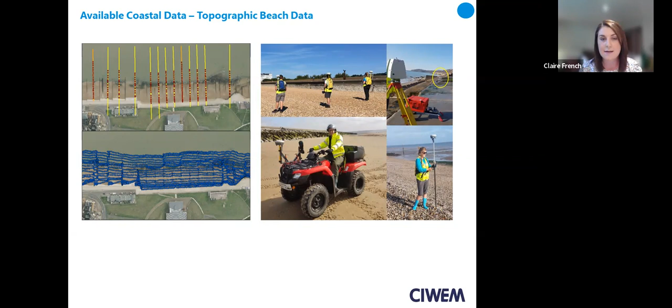Moving forward in time, probably 5 to 7 years ago, we started to go for mobile data scanners, so mobile laser scanners. It's a bit like Google Street View. We can mount a camera onto the quad bike, drive along the beach, and it collects data much like a static scanner, so the point density is much greater.

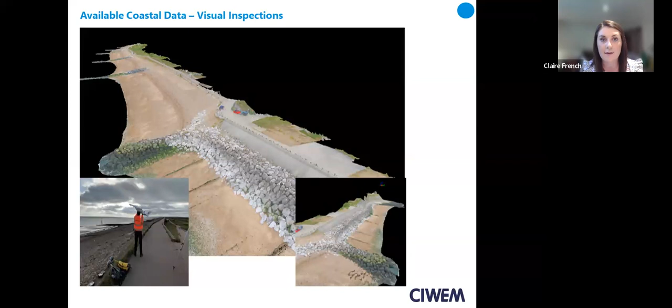More recently, again, sort of 5 or 6 years ago, we're looking at UAVs. This is an output from a UAV data set. You can see the difference in comparison to the points that we had on the maps in the previous screen. You can use this data set for beach analysis and also structures, so we're looking at assets. And then lastly, it does just give updated aerial photos.

Moving on to aerial photography, part of the monitoring programme data that's available, freely available on the coastal monitoring website, is ortho-rectified aerials. For the majority of the frontages, we've got aerials from 2003, 4, 5, right up to current day, collected every few years. They can either be used, in this instance Dungeness Peninsula, to gauge linear meterage accretion, basic visual assessments, or just used as underlay in your GIS programs to overlay your data and as a visual tool.

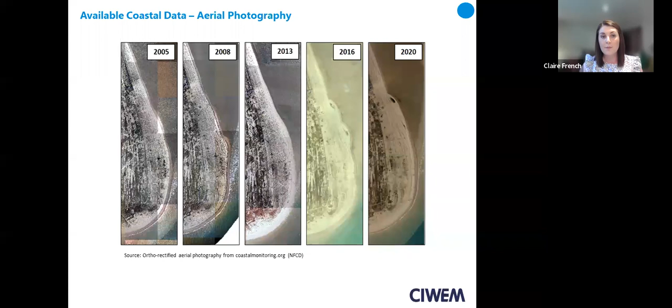Moving on to structure surveys. This is again the available data that we need to use for all our projects. This is essentially a continuation of the beach profiles, so the transects go up and over the defences.

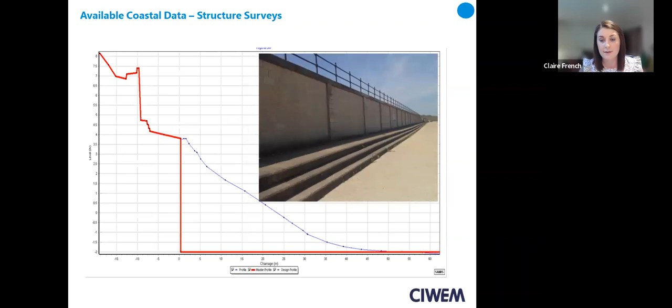This can either be a one-off or we can do it every few years. Again, this just provides a basic schematic with all the elevations and detail to do with the defences behind the beach. Where we don't have that information, it might be available through local authorities or the EA, or if doing it on a project by project basis, this is something we commissioned ourselves.

So the structures topographic surveys give us all the data for the visible defences. However, we don't actually know what's going on underneath, the buried part of the structure. Data we've collected before is through trial holes, where we've uncovered the buried section of the defence, either to ascertain the schematics and levels, or to aid the condition assessment.

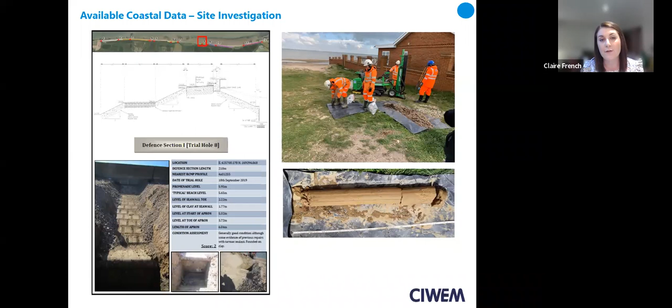As part of that, we can either draw up, or we would already have, structure schematics, which give us the elevation and geometric design. Alternatively, something we've done in the southeast is commission boreholes. One of the projects we were working on was a flood defence bund and we needed to ascertain its structural integrity, so we ended up coring through it. Some local authorities may hold this data as well.

Moving on to live wave and water levels. Quite a lot of this data is available on the Coastal Monitoring website. There's a real-time page which shows the network of wave buoys and tide gauges, many of which have been in place for 15, 20 years. That data links through to the Cefas website, which has additional wave buoys, so you can use both interchangeably.

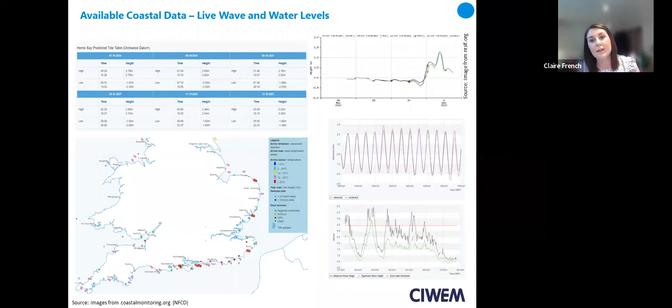The Coastal Monitoring website has all the tide levels available for all the tide gauges around the network for a week at a time, always a rolling week. There's real-time data for wave periods, swell waves and tide levels. In addition, we dial into the National Sea Level Facility, Tide and Sea Level Facility website for storm surge data. This can be used to aid emergency planning for storms, and it can predict surge levels if you're going to attend site.

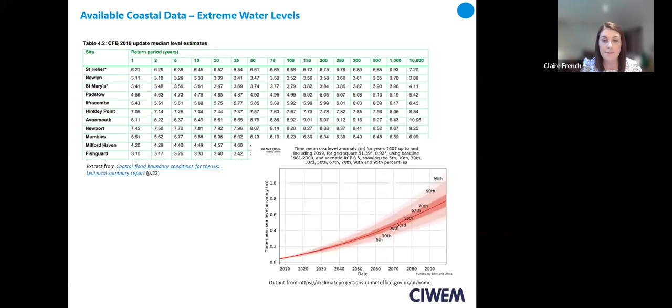Then moving on to extreme water levels. JBA produced, on behalf of the Environment Agency, coastal flood boundary conditions. This was an update of earlier work, done in 2018 to update the extreme water levels. That's available on the Gov website, and we also use the UK CP18 climate change predictions, both large data sets available online.

Lastly, for raw data, recycling logs are quite crucial for understanding beach management. It also allows us to create a do-nothing scenario and strip back the as-surveyed data to understand natural processes. Monitoring programme leads should have the majority of this information as it should be incorporated into their annual reporting. If not, local authorities and environment agencies should also have details of their recycling or replenishment works.

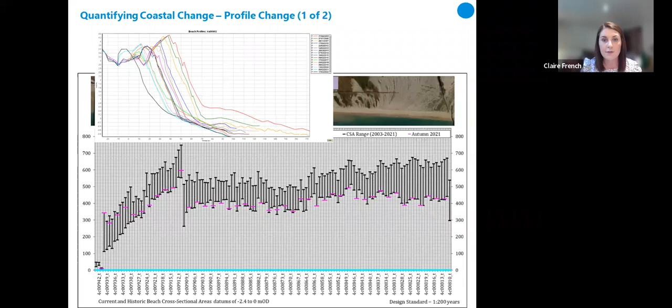Alternatively, you can just do simple mathematics, take one away from the other and get a difference. We can represent this in GIS using thematic lines, color coded based on the percentage erosion, displaying either percentage or actual change. Not all our beaches are bright red - I've picked one that's a bit more interesting. These are produced from the monitoring programme, but it's quite simple to replicate for your own projects.

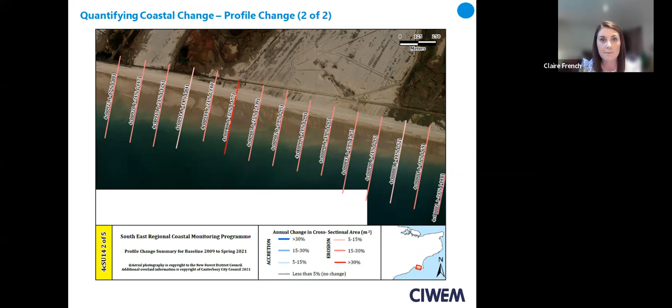Starting to move on to volumetrics, again we'll start with the very basic. If we've got one digital ground model, we can take it away from the previous set and it will give us a difference model coloured map.

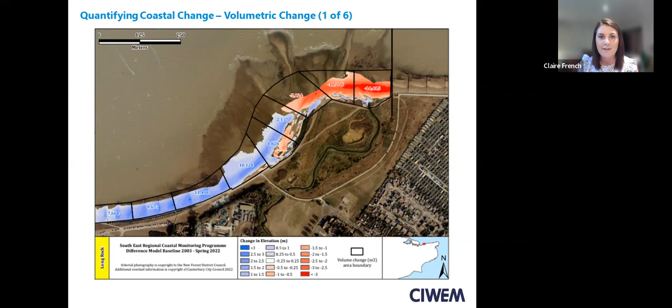We can overlay polygons so that we can do some spatial interrogation, and it will quantify the loss or gain experienced on the beach. So the two sections in bright red on the north, that is the section for the profile that I just showed you with the 50-metre retreat. Again, quite nice graphics to illustrate your data.

Alternatively, you want to start to look at total beach volume - that's quite handy in some circumstances. So we can use a plane, whether that be rock level, chalk platform, clay level, or just an arbitrary 0 metres above ordnance datum. You can create what we'd call a fake grid and do a difference model with your most recent data set to give you the current total beach volume.

You can extrapolate that data forwards or backwards to give you a total volume change graph similar to this. This is purely measured on as-surveyed data. The large jump in 2010 to 11 is actually a beach replenishment scheme, but it's masked in the monitoring programme data if you're just taking that data on face value - so that's what you need the recycling logs for.

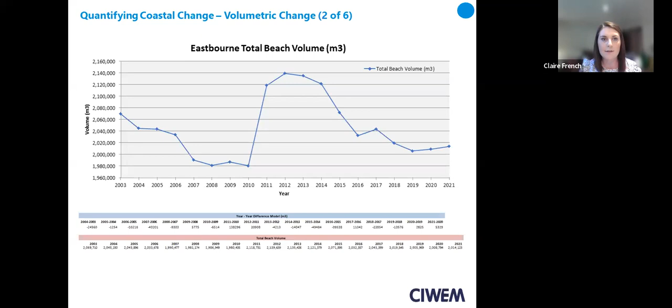So then if we go to a more in-depth analysis, for this we've used Sediment Budget. I won't go into it in too much detail because it's not a presentation on Sediment Budget, but I will recap what we've done. We took the Rosati and Kraus Sediment Budget analysis system method, slightly amended it to include natural losses. The equation's the grainy thing in the middle.

We know all of these inputs with the exception of the output. The output will be the longshore drift rate. So the Q input is the volume of sediment entering the cell. The delta V is the volumetric change - that's the survey change, which masks any human intervention. Then we've got the material deposited on the frontage, material removed from the frontage, and any losses attributed to attrition, abrasion, or associated with replenishment or recycling.

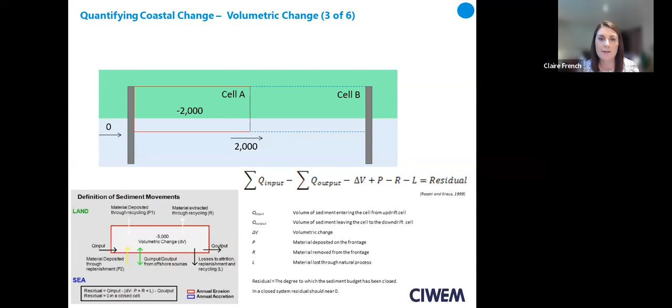So I will very quickly run through the calculation. My two grey sticks on the screen are my terminal structures. If we start with cell A, nothing's coming in, it's a terminal structure, so we know our Q input. The surveyed value is 2000, so we assume that 2000 is going straight into cell B. Our recycling logs suggest 3000 meters cubed is coming in from recycling and 1000 from replenishment, which increases the sediment transport rate to 6000. Due to the calculations of natural losses - your attrition, your losses from recycling - we've calculated 400 coming out of the cell, reducing the longshore transport.

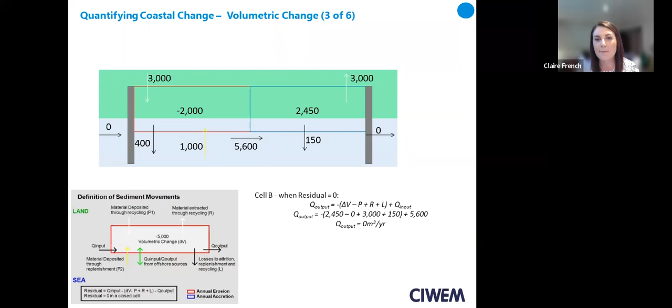Then we start looking at cell B, so there's a recorded gain on site of nearly 2,500, which would suggest that over 3,000 is now going past the terminal structure. Looking at the recycling logs, we know that 3,000 meters cubed was included as part of that recycling scheme, so now only 150 meters cubed is going past the terminal structure. But miraculously, that's all natural losses, and our sediment budget closes with a zero residual.

Once we started to do that, we can do it for any given length of coastline, and essentially it's just a process that works through the polygons we've provided, or that you can designate, and we can produce something like this. This is quite in-depth, and it shows the summary sediment budget. Just as a side note, because we've got 20 years worth of data, the difference models we would calculate would be the most current day.

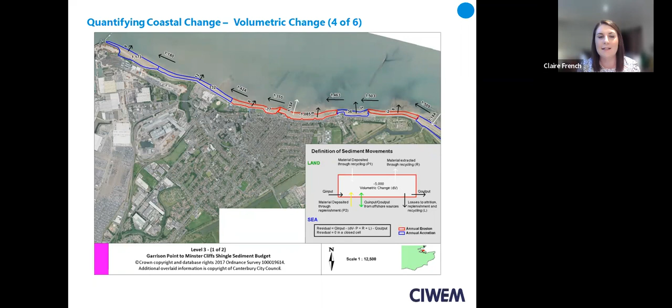So we've got 2022 to 2003, and we do an average annual calculation for all of these, all the recycling, all the difference models, and all of the transport rates. So we would consider that fairly reliable. It's a sort of an average of 20 years, and it masks any large storm events or any sort of unusual data sets.

That gives us, with some confidence, trends that are quite detailed. We could strip that back to just plot the natural trends. So if we basically undid everything that was added in, and added back anything that was taken out, it leaves us with a natural trend - if that work hadn't been done, these are the volumes or trends we could expect.

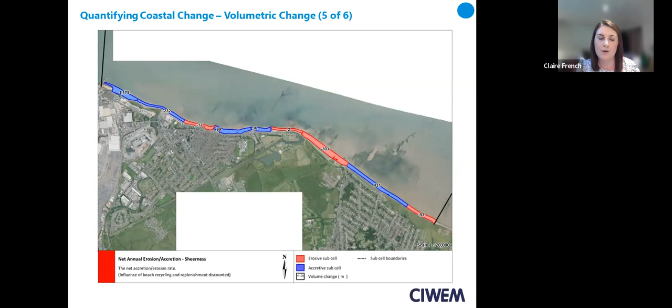Then lastly, we can just look at sediment transport. So we could plot the transport rate arrows, which, if there's an area where beach sediment transport rates are massively increasing, can highlight a possible area of weakness along the coast, where you didn't want a high transport rate. This can help start to look at beach management options.

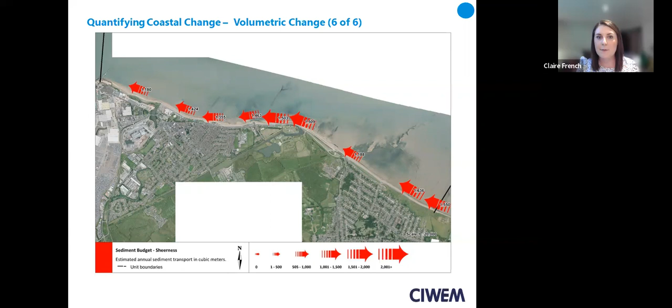So I'll hand over to Andy.

Thank you, Claire. In this section, I'm going to touch upon creating defence sections to represent your coastline. Then I'll touch on two failure mechanisms for beach and seawall defences - overtopping of the defence and undermining - and then trigger levels for beach design.

This is probably one of the most crucial stages. Before you start modelling a beach at all, you need to know what your different defences are. So you start by splitting them into representative sections based on the sea wall type, the crest level, any apron you've got in front, and any other features, whether that's offshore breakwaters, etc.

It's a bit of a trade-off, because you don't want so much detail that you have hundreds of sections, since there's a lot of analysis done per section, as I'll go into later. But equally, you don't want to be so broad-brush that you represent a whole flood basin frontage in a single section, because you might miss detail that would tell you where your critical pinch points are.

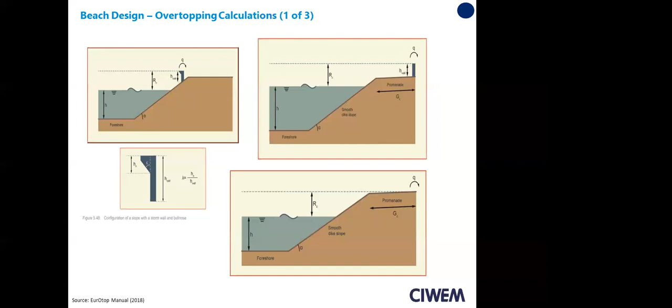Manual, but what we did at Canterbury was put it into a spreadsheet, which essentially allowed us to model various different defence types, still with a fair bit of manual input, but a lot quicker than using the online tool.

Cheers, Claire. Sorry, I apologise because only one of us can present. Claire's having to guess where my slides are coming from, so bear with us on that one.

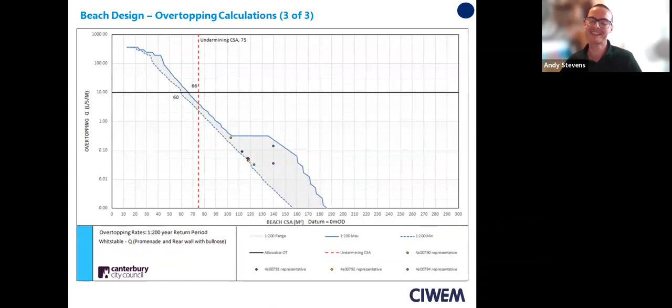Andy, just to check you there, I think we're having some connectivity issues. He's definitely frozen. Sorry, everybody, bear with us one moment.

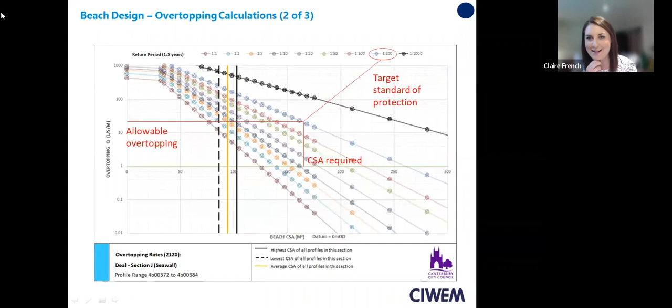Andy's going to leave and rejoin for us. Wouldn't be a presentation without some IT issues, eh? Hopefully he can jump back in. If not, I'll give his slides a go. Just a reminder to everybody listening, there is a question and answer function on Zoom, so if anybody has burning questions for Claire or Andy, feel free to put them in the Q&A box and we'll pick those up at the end.

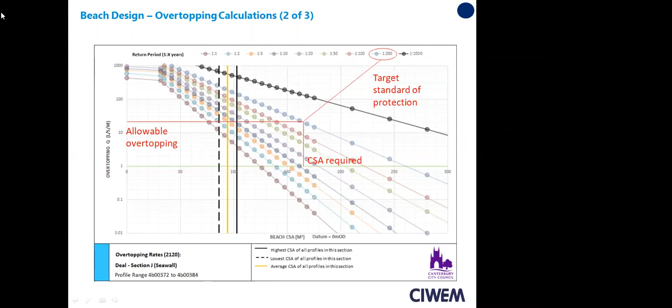Here we go, Andy's coming back. Let's just see if he's... Yes, I apologise about that. Technical. Hi, Andy. Doesn't tend to happen in person. Hopefully no problem. Sorry, did we get any of this slide, Claire? Yeah, we did, I think we just started on the next slide. So if you want to pick up from there, that would be great. Thanks, Andy, fantastic, yeah, great.

So this plot then shows similar, because we've modelled a range of beach configurations, the latest spreadsheet allows for up to 100 different configurations, so that's different sizes of beach berm, different elevations, and different beach slopes. This graph basically synthesizes all of that data, and it shows the maximum overtopping you could get, the minimum, and then obviously that range.

The point data there is just validation from various different beach profiles, so the data collected as part of the Regional Coastal Monitoring Programme, as Claire explained, that's basically different profiles within this representative section. Again, using this graph, we can read off the level of overtopping you'd expect per beach size. Because we've modelled a whole different range, when you're looking at your do-nothing scenario for the future, you can look at the worst case. So if the beach were to orientate itself in the worst case position with regards to overtopping, you can know what to expect, so it means you're not under-predicting future risk.

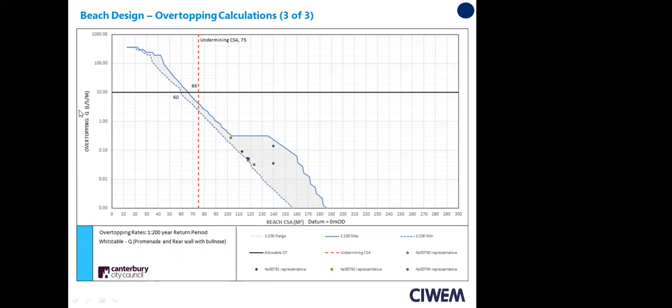Great, so the next one is undermining. This is a bit briefer. The methods we've used are fairly simple, because generally speaking, the failure mechanism here is that your beach in front of the defence gets washed away and it exposes the beach toe. Then you can either get wash out of fill material or in some cases overturning of the defence, but typically what you need to know here is your structure toe.

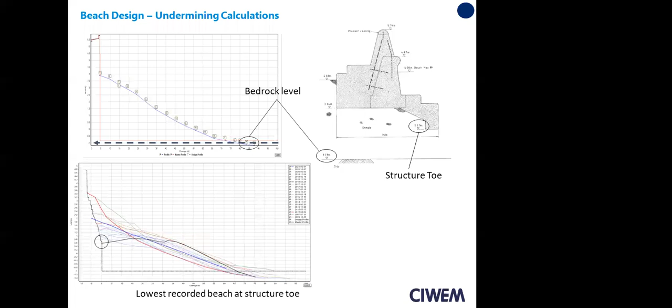So, trigger levels. As I said, we've looked at overtopping and undermining as failure mechanisms, so for both of those approaches we now have a cross-sectional area of beach required to provide protection against that failure mechanism, and from that you can start to design your beach. In the terminology we've used, critical gives you your standard of protection—so if your beach is on critical, you are just about, by the skin of your teeth, providing the level of protection you said you are.

Then we have buffer zones, which we call maintenance and design—sometimes they're combined. The Environment Agency often uses terminology alarm and crisis; different terminology has different emotions attributed to it. We started fresh when we did the regional beach management plans across the southeast, but we appreciate different people use different terms. With the design and maintenance level, you can go back to the monitoring data, look at what is the worst erosion we have on record, and apply that as your buffer, because then you've got a scientifically based buffer level rather than just guesswork, which may well have happened in the past.

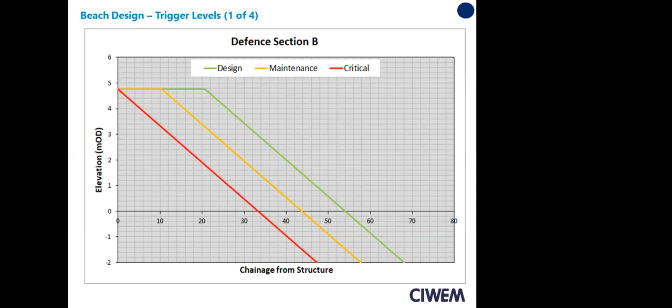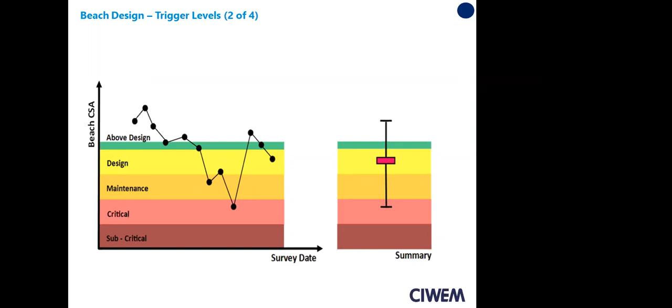But sometimes a business case might be for a small part of that frontage, sometimes you might be looking at a scheme for several units. With these graphs, it's an Excel-based tool we developed. If you want to change the range, you just change the setup of the spreadsheet.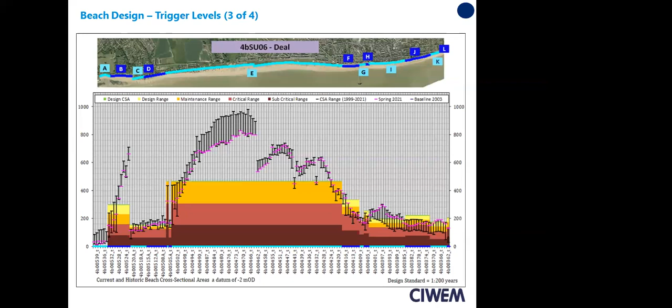It's a very quick way of telling you in context what your current beach is. For this example, you can see that middle section has a lot of very big beaches well above design level. So although it's alarming to see the current beach is at the bottom of the entire data set, it's still well above design levels. Where residents tell you they're losing beach and need you to do something, you can calmly show them this graph and explain that they have lost beach, but they're still not at flood risk.

And another way of displaying similar data - where that graph was for the design for the 1 in 200 level, you can, going back to those overtopping graphs, actually calculate what your current standard of protection is before you've done any work.

Whether you can actually hold enough beach physically for that standard of protection, or whether you need to put in mitigating factors, whether that's a larger rear wall or some sort of flood resilience behind the flood defence.

This graph shows the exact same frontage, but for 100 years' time, accounting for climate change. The data on climate change estimates is readily available - the Environment Agency provide predictions for use in flood defence grant and aid applications. This shows you that if you were to do absolutely no work on this frontage, what would happen to the standard of protection? As you can see, it's a fairly bad picture.

A lot of the frontage wouldn't even be a 1 in 1 year - you'd essentially be expecting flooding several times a year. This can be a really valuable tool for engaging with the public in areas where perhaps you can't do work, or engaging where you're looking at different schemes, demonstrating why you're doing something outside someone's house, why you've got trucks on the beach, why you're building a seawall. You can explain why that is.

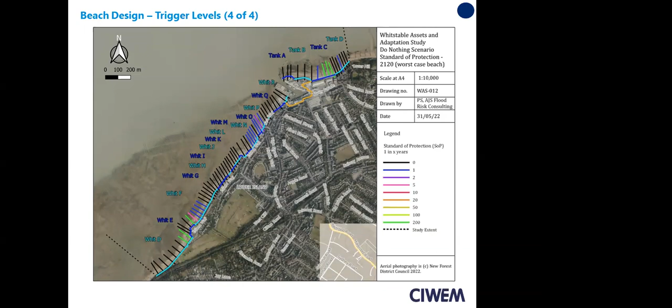So the next part of the talk will be on actual managing these works on site. We've gone into the theoretics of how you might design a beach, and now we're going to the practicalities.

It was a little bit shoehorned in here. We originally had a whole section on incident response, but essentially the data that's available is fantastic. We have live data on the Regional Coastal Monitoring Programme. You've got tools like the National Tide and Sea Level Facility that give you surge predictions up to 3 days ahead. Between the two, you can very quickly both model what sort of events you might have a few days in advance, but also monitor storm events as they occur.

So you can see what sort of waves you're getting, and it can just help you. Typically at Canterbury, when we have a flood emergency, or a storm big enough to trigger one, we'll have people on site actually physically monitoring, and then someone in the control room looking at this live data, WhatsApping out what the water levels are and what we need to do about it.

It's especially useful for councils such as Canterbury that have a lot of floodgates that may or may not need closing. So this data really helps you not to under or over respond to an event.

Equally with incidents, the Regional Coastal Monitoring Programme provides what I believe are now called incident surveys, previously post-storm surveys. So if there were triggers for storms based on significant wave heights, they will come in as soon as safely possible and profile some of those beaches, so you can get the beach at its worst, which is incredibly useful for business cases, because if you can't capture the beach at its worst, it's hard to demonstrate what the full risk is.

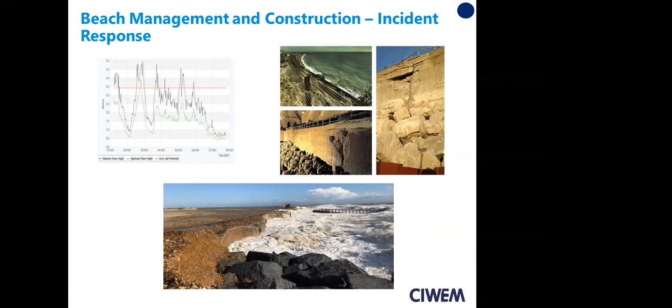So going into planning works, whether you've just had a storm event and you're doing remedial works to fix what was broken, or whether you're just doing more strategic long-term planning, the data that we have can really quickly be used to plan your works effectively.

So this graph shows the purple line is the current beach, that's what we actually have. The green, orange and red solid lines refer back to those trigger levels, and the red dotted line shows you what the beach profile will be after the works. For this example, it's an overfilled groyne bay where we can extract beach material for use elsewhere where there's not enough. So very quickly we tend to use spreadsheet tools because it's what we know, but there's various ways of doing this.

You can essentially put the monitoring data in context, and it really helps. Having these sort of diagrams on site is a lot less vague than just telling a contractor, oh, could you just dig out some beach for me and move it around? It also gives you assurance that if you're telling them to move 1,000 cubic meters, you can actually have the beach and you're not going to start jeopardizing the standard of protection.

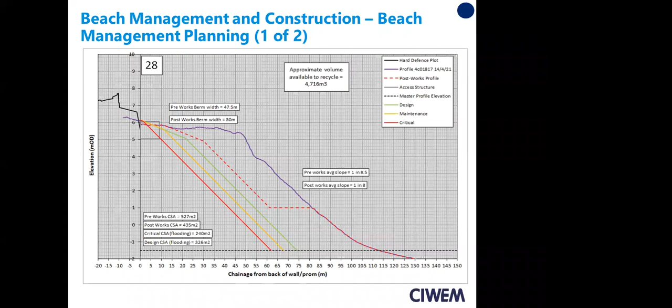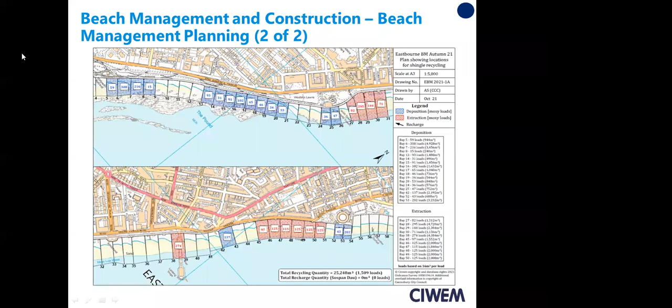Great. So the final thing I'm going to touch upon is just groin design. So again, when you're designing a groin, you obviously need to know what beach you want to hold, which would be your design beach. But you also really need to know what your minimum beach is on record. And that's where the coastal monitoring data is really valuable.

Because what can tend to happen is one of two things. Either you under-design your groyne, and then there's a risk that your bottom plank level or your waling, which is sort of sheet piling, will get undermined in a storm event, or you do the opposite, which is over design. You build the entire groin right down to bedrock at massive expense, and actually you didn't need to. So knowing what your minimum beach is, you can do a fairly good design.

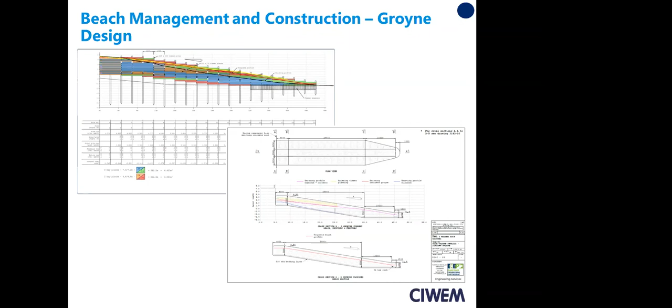You might just about be able to see the lines on the rock groyne diagram to the bottom right there. So essentially, when we were cost engineering this rock groyne, we're building it looking at the minimum beach ever on record, so that size wouldn't undermine it. And with this, because you're putting the rock groin in there, you're actually reducing sediment transport, so you wouldn't actually expect to ever reach that minimum, but it just gives you a good design, beach design to work off.

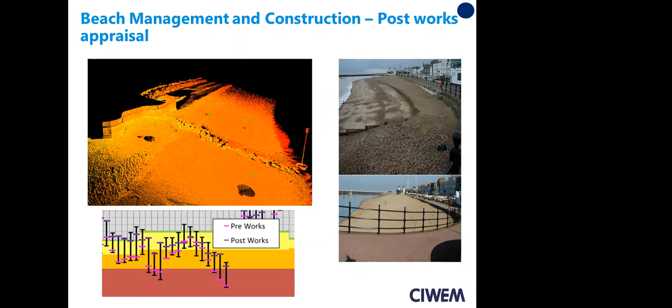Now I'm going to summarize a lot of what we talked about in a case study - the Whitstable Horsebridge to Harbour Beach Replenishment Scheme in Whitstable, on behalf of Canterbury City Council. This is the frontage, a fairly small area either side of Whitstable Harbour, but it's vulnerable because a lot of the other coastline has had beach replenishments in the last 20-30 years, but this section hasn't. The beach changes are actually very small in Whitstable, but as a product of climate change, the standard of protection has been creeping down, to the extent where we've designed this scheme - and to jump to the end, it's now got funding from the Environment Agency and should be constructed next year.

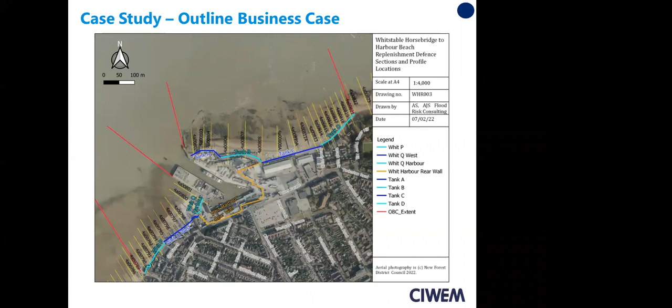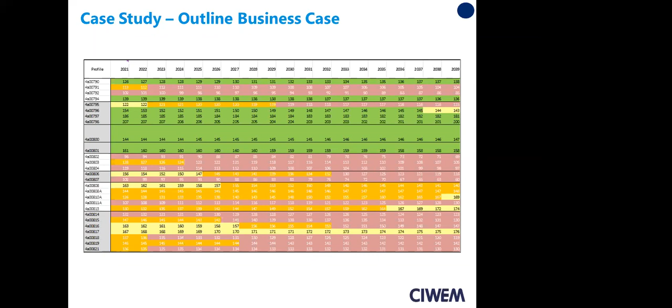You can quickly plot using this color coding what your design level is, with red being the critical level. In this graph, you can see very quickly a lot of these beach profiles either are under design now or very quickly go under design, so you can start to look at when you'd need to intervene.

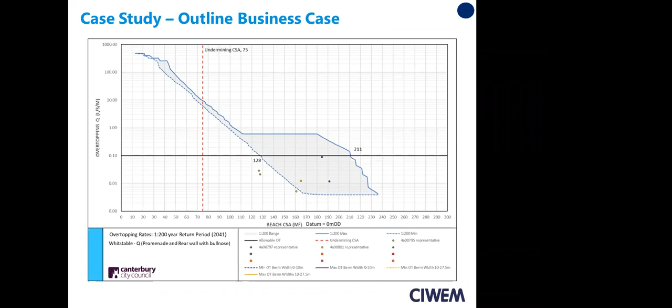Then we move on to flood modeling. The main input here was our overtopping calculations, and the underlying digital elevation model comes from LiDAR data, which is freely available. One of the links we'll send out at the end is for the Environment Agency environment data website - you can get up to 1 meter, sometimes half a meter resolution grid cells. It's a fantastic resource, sometimes a bit cumbersome to use, but free of charge, so I really recommend that. They have that going back in time, and the regional coastal monitoring data also goes a lot further back, but you only have your data on the beach - the LiDAR goes inland as well.

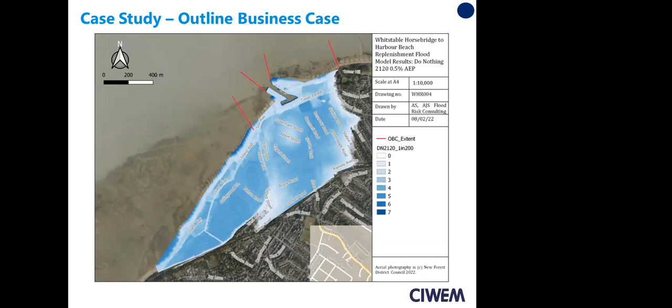And here's the final product of the analysis, what our recommendations were. With regard to the business case, we now know how much beach material we need and where it's going, so we can come up with a methodology for how much beach management plant you would need, and how we might bring the material, whether by barge or by road. Then you can cost that up.

You already have your benefits, which you can calculate with the overtopping flood modeling and other data sets. You can work out what your damages are, and then do your economic analysis. There's far more that goes into a business case that I won't go into, but in terms of coastal monitoring data, that's the key input. You can go all the way up to economic appraisal, so it's really invaluable. I can't overstate the wealth of data we have in the UK and how useful that is when appraising and developing schemes.

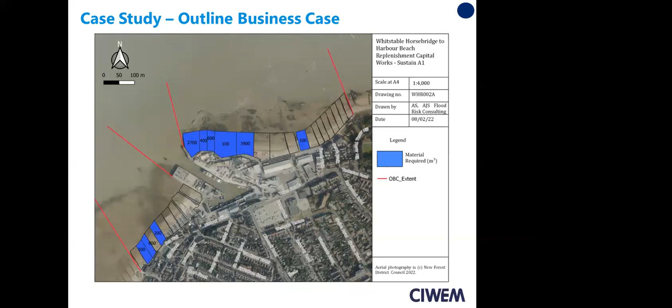Great, so that's our run through. Apologies for the technical difficulties. I hope I won't crash out during questions.